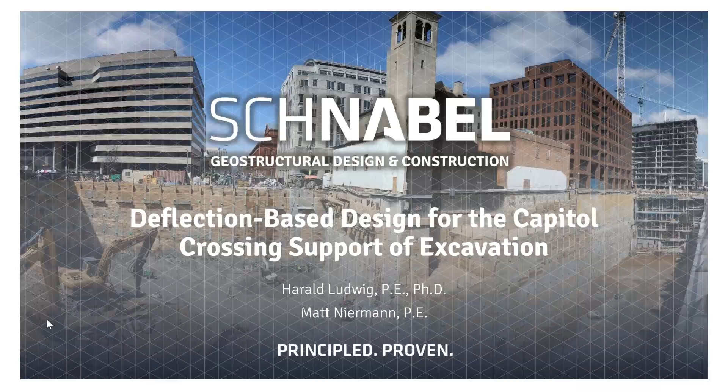I have been with Schnabel for over 40 years in several different positions, ranging from R&D engineer to construction manager to regional manager and VP of the Mid-Atlantic region. Presently, I am a senior project manager in pre-construction. My involvement with the Capitol Crossing project was as the lead design engineer. Schnabel is a leading nationwide design-build contractor that has been providing customized earth retention and specialty foundation solutions for clients throughout the construction industry for over 60 years.

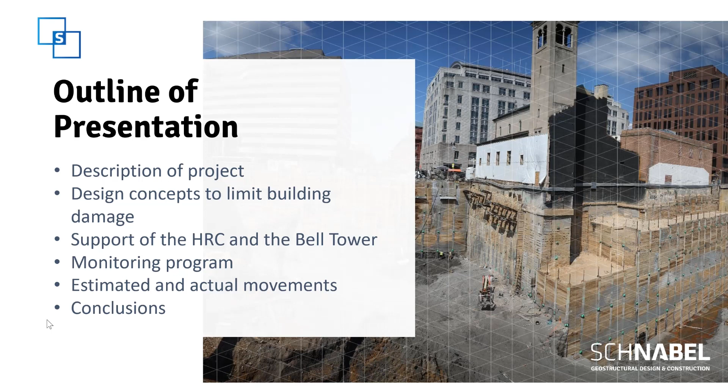The outline of the presentation is shown here. A brief description of the project is followed by a discussion of design concepts to limit building damage. The support of the Holy Rosary Church, HRC, and the bell tower is then described, followed by a description of the monitoring program. Estimated movements are compared with actual movements.

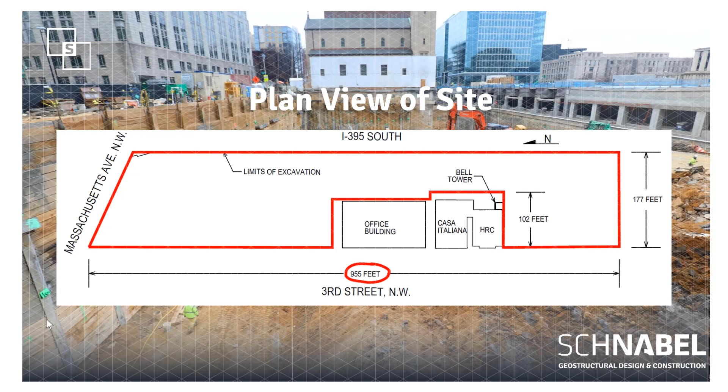The temporary SOE for the Capitol Crossing project consisted of a combination of drilled-driven soldier piles, lagging, tiebacks, braces, underpinning, single auger soil mix walls, micropiles, and a tieback slurry wall. Schnabel designed and installed all of the SOE except for the slurry wall. Over 130,000 square feet of SOE was installed, with more than 1,300 tiebacks providing lateral support for excavation depths of up to 72 feet.

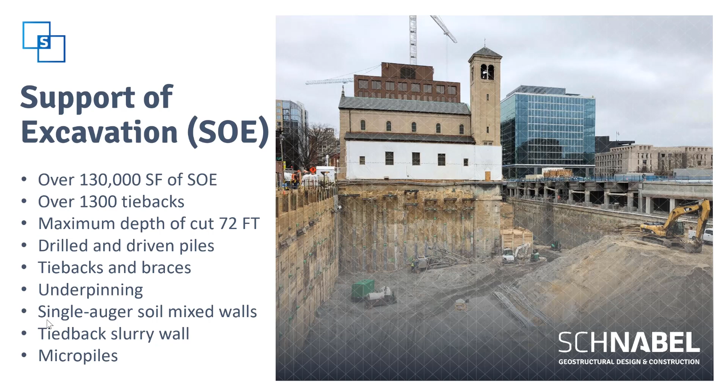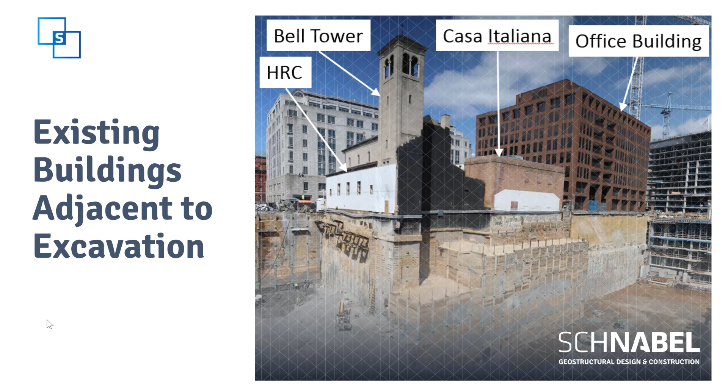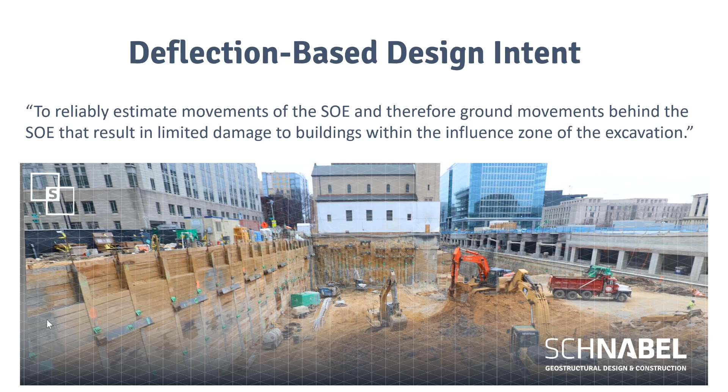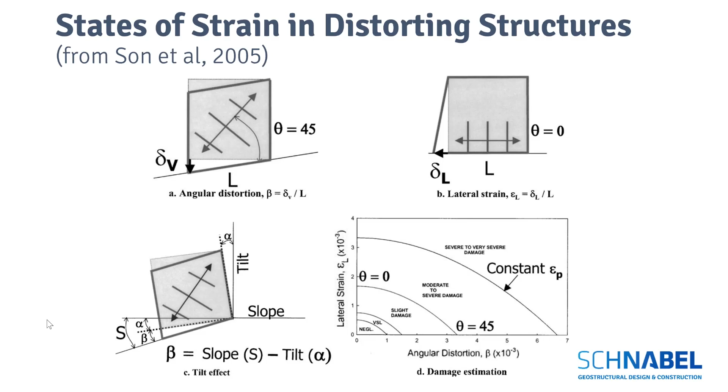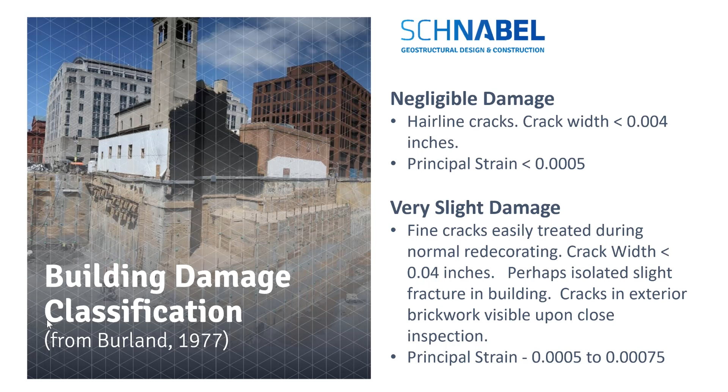The estimated strains are then used to predict potential building damage per the building damage classification shown in the next slide. The two categories that we're interested in for this project are very slight damage and negligible damage. The goal was to limit any damage to very slight or less. One of the adjacent buildings, the HRC, had beautiful stained glass windows on the south side, which were sensitive to any differential type of movement. Per the descriptions given in the slide, the goal would limit damage to fine cracks with crack widths less than 0.04 of an inch. By definition, the fine cracks could be easily treated during normal redecorating.

The lateral displacement of the SOE wall that occurs during excavation is mainly controlled by the relative soil wall stiffness. This is a function of the bending stiffness, EI, of the SOE, the distance L between lateral supports, and the modulus of the soil, Es. The volume of the surface settlement trough can be estimated from the volume of lateral wall displacement. In sands, the settlement profile is modeled as a parabola, with the parabola extending a distance of 2h from the SOE wall face, h being the depth of cut.

Lateral soil SOE wall movements consist primarily of cantilever movements due to excavation prior to placing the first tieback or brace, lateral bulging movements that develop below the supports as the excavation proceeds to subgrade, and lateral movement due to rotation of a tieback wall as it settles.

On this project, lateral bulging movements comprise the greatest component of the total movement measured. Note that the three components of wall movements listed do not include movements due to installation of the SOE and movements due to translation of the wall to develop lateral resistance of the toe.

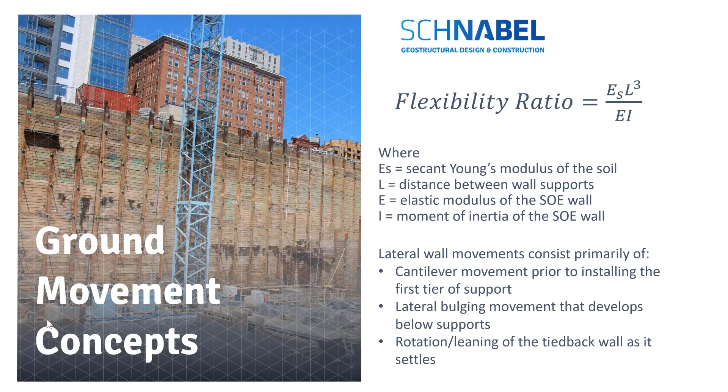A section through the HRC is shown here, showing the support, supported by 6 tiers of ties. It shows a test boring or soil boring, which is typical of the site, some fill overlaying some large deposits of alluvial materials. The soil profile consists mainly of alluvial deposits, as mentioned.

A 30H trapezoidal earth pressure diagram was used, plus any building surcharges, to provide an initial SOE design. This design was enhanced by deflection-based design considerations. Pile sizes were increased and an additional row of tiebacks was added to the upper 17 feet of the SOE to produce a much stiffer wall.

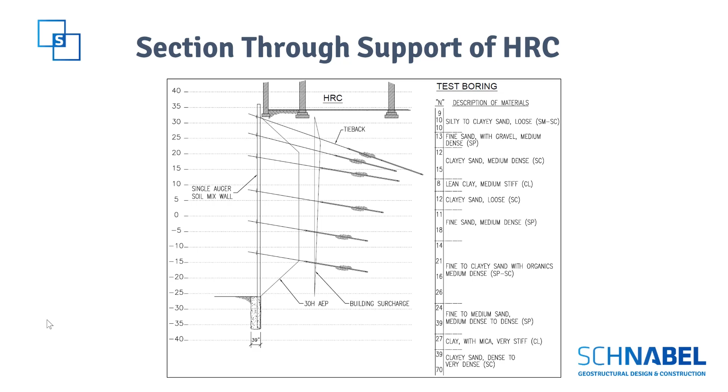It is supported by exterior reinforced concrete footings and 8 interior column footings divided in 2 rows running in an east-west direction. The interior column footings are located 12 and 40 feet from the exterior south wall. The maximum depth of cut adjacent to the south side of the HRC was 59 feet. Approximately 26 feet of that was below the water table.

Single auger soil mixing was used to support this side of the building. It consisted of drilled shafts spaced at 2.5 foot centers with piles in every other shaft. Up to 6 tiers of tiebacks were used to provide lateral support.

The 85 foot tall bell tower has an approximate 14 foot by 14 foot footprint. The tower is supported by a 28-inch thick reinforced concrete mat footing. Excavation was done around 3 sides of the tower. The south side of the tower was excavated to a depth of 56 feet, while the east and north sides were excavated to a depth of 27 feet, immediately adjacent to the tower.

Along the east side, at a distance of 18 feet from the tower, the excavation was advanced an additional 32 feet. The final design of the SOE comprised continuous conventional hand-dug pits to support the bell tower. 6 tiers of tiebacks were designed to provide lateral support on the south side of the bell tower.

In order to try to limit movement, the design called for 3 tiers of tiebacks to be installed in the first 17 feet of excavation to create a very stiff wall. The first tier support was installed 3 to 4 feet below the top of pile to limit cantilever movements. And tiebacks were locked off at 100% of the design load to further limit deflections.

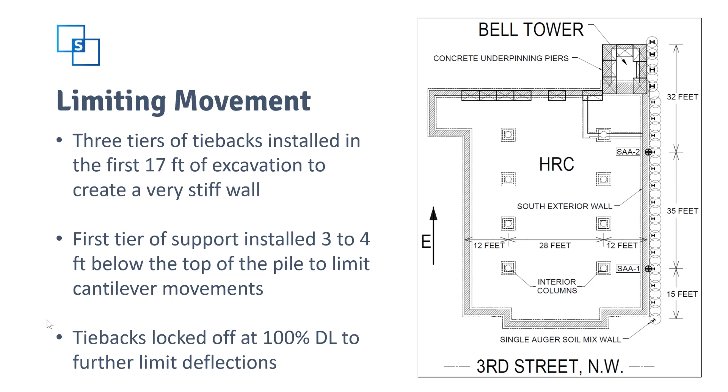An extensive real-time monitoring program was implemented to measure movements of the building and the SOE. Prisms were used to measure exterior building wall movements in 3 directions. Prisms are denoted by the tiny red squares on the walls, and also on the underpinning pits. 2 inclinometers were attached to 2 of the piles, the 2 we talked about just previously, inclinometer number 1 and inclinometer number 2.

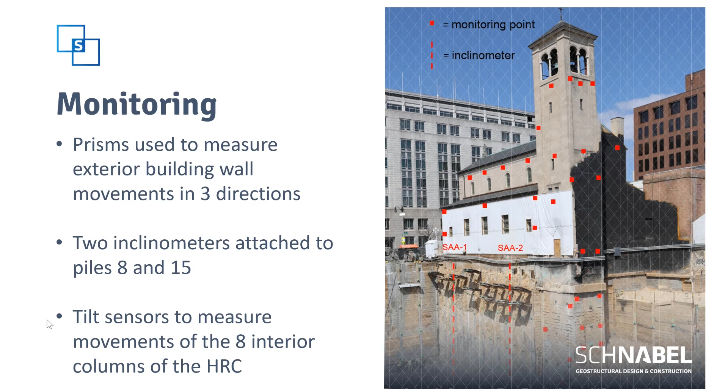Here's the corner of the excavation that I alluded to, 15 feet. SAA-1 was located 15 feet from the corner, and number 2 is located about 50 feet from the corner. Tilt sensors were used to measure movements of the 8 interior columns of the HRC. A comparison of estimated and actual movements near the inclinometers is shown here.

The lateral movement at the pile tops, both pile tops, was on the order of 0.1% of the height of the cut, or less in the case of inclinometer number 2, about half that or a third of that was measured at inclinometer number 1. In both cases, very good performance. The settlement of the HRC at the south wall was in the order of ½ an inch at inclinometer number 2 and 0.15 of an inch at inclinometer number 1.

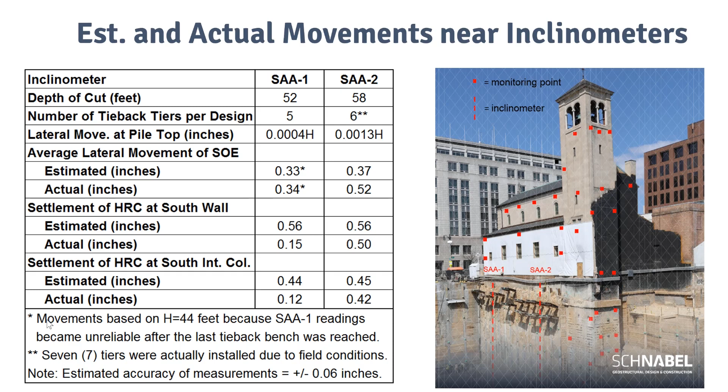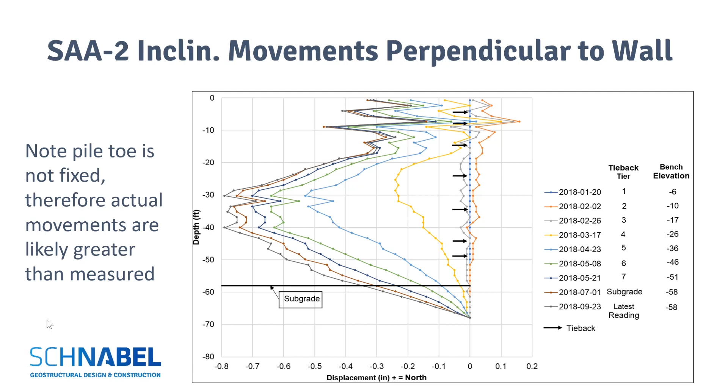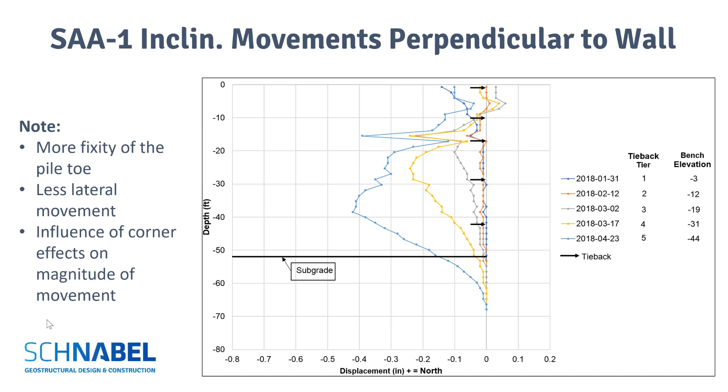The movements measured by inclinometer number 1, perpendicular to the wall or into the excavation, are shown here. It's clear that there was more fixity of the pile toe compared to inclinometer number 2, and that there was less lateral movement, but there was still bulging movement up to 4/10 of an inch. And we believe that this was due to the influence of corner effects on the magnitude of movement. Again, inclinometer 1 was located only 15 feet from the corner of the excavation.

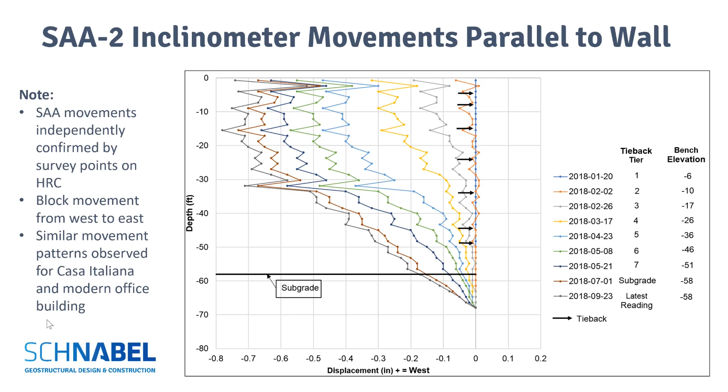We observed similar movement patterns for the Casa Italiana and the modern office building. You can see that the magnitude of movement was between 7/10 and 8/10 of an inch in a west to east direction. So what are the conclusions to the presentation?

1, the performance of the SOE met the design goal of limiting building damage to very slight or negligible. 2, the deflection-based design method developed by Cording et al. estimated both lateral and vertical building movements that were reasonably close to actual building movement. 3, the inclinometer located near the west end of the HRC measured movements that were less than estimated. This was most likely due to the influence of corner effects on SOE movements.

4, for any excavation adjacent to an existing building, the SOE design intent is to limit potential damage to the building. Selecting the earth pressure and surcharge pressure diagrams is just one step in designing the SOE. It is essential to consider the stiffness of the SOE in the design as well. Acceptable potential damage should be agreed upon prior to start of construction.

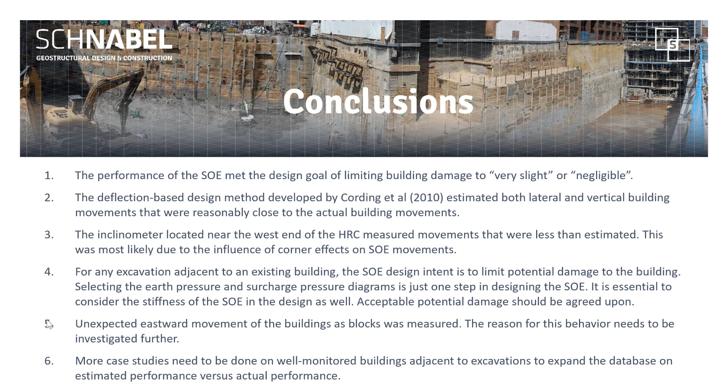5, unexpected eastward movement of the buildings as blocks was measured. The reason for this behavior needs to be investigated further. And finally, more case studies need to be done on well-monitored buildings adjacent to excavations to expand the database on estimated performance versus actual performance. This brings me to the end of the presentation.